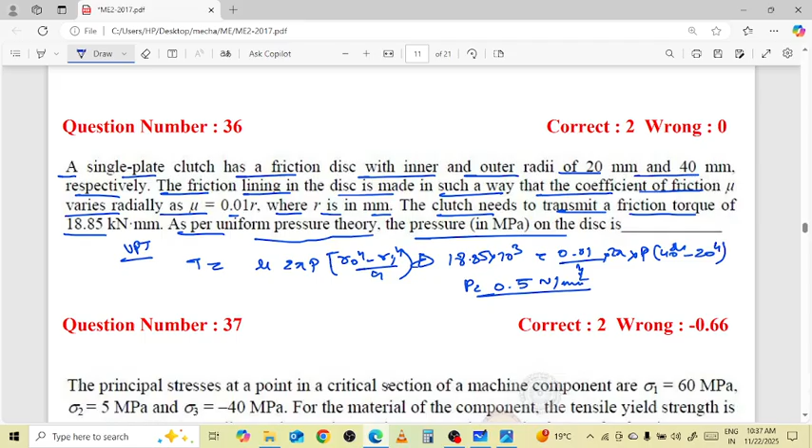We have to find the pressure value here. So 18.85 multiplied with 10 raised to power 3 equals 0.01 divided by 4 into 2 pi into p times 40 raised to power 4 minus 20 raised to power 4. So the p value is equal to 0.5 Newton per millimeter square. So here it is also in megapascal. Newton per millimeter square is megapascal, right?

Easy. Now next question. The principal stresses at a point in a critical section of a machine component are sigma 1 60 megapascal, sigma 2 5 megapascal, sigma 3 equal to minus 40 megapascal. For the material of the component, the tensile yield strength is sigma y 200 megapascal. According to the MSST, maximum shear stress theory, the FOS is to be asked: 1.67, 2, 3.6 or 4. MSST, maximum shear stress theory.

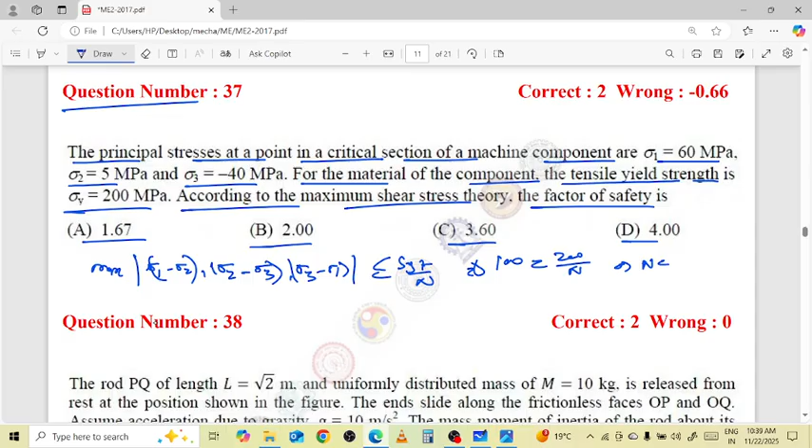So over to you here: 100 is equal to 200 by factor of safety, so the n value is 2. Easy. Next question we have.

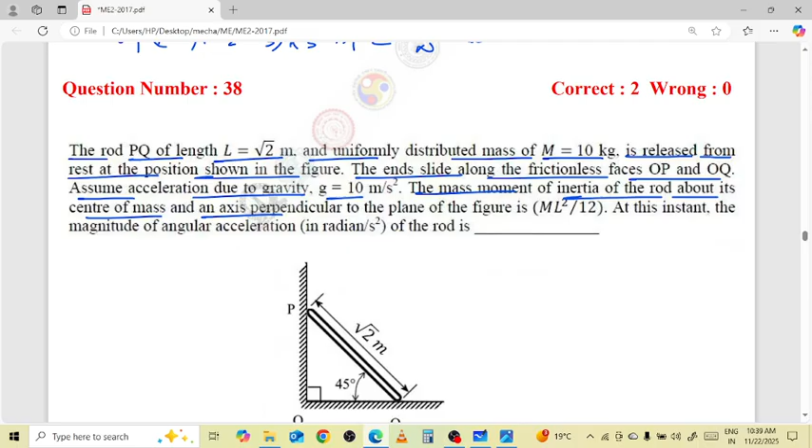Next, 38: the rod PQ of length L equal to square root of 2 meter and uniformly distributed mass M equal to 10 kg is released from rest at the position shown in the figure. The ends slide along the frictionless faces OP and OQ. Assume acceleration due to gravity g is equal to 10 meter per second square. The mass moment of inertia of the rod about its center of mass and axis perpendicular to the plane of the figure is ML square by 12. At that instant, the magnitude of angular acceleration of the rod is to be asked.

Here the rod POQ is given, with side square root of 2 meter, the PQ length, and 45 degrees. So the inertia is equal to ML square by 12 plus M y square. So here the value is 10 multiplied with 2 by 12 plus 1 upon 2, so 6.67 kg meter square. We know the torque: torque is equal to mg times x.

x displaces, equal to I alpha. So alpha value is mg times x upon I, and the 45 degree angle is visible, so here x is square root of 2 by 2. So the value of alpha is 10 into 10 into 0.5 by 6.67. So alpha is equal to 7.5 radian per second square.

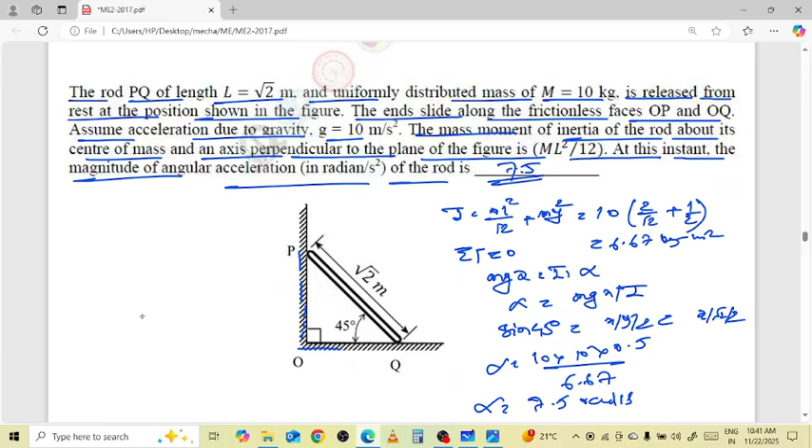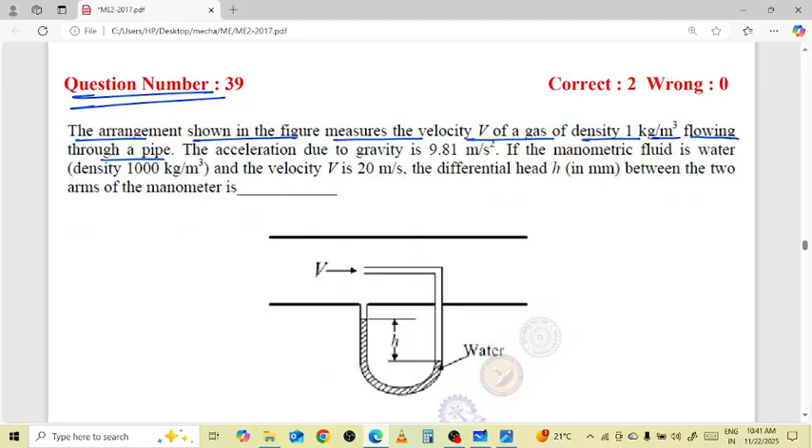Next question we have question number 39. The arrangement shown in the figure measures the velocity v of the gas of density 1 kilogram per meter cube flowing through a pipe. The acceleration due to gravity is 9.81 meter per second square. If the manometric fluid is water, density 1000 kg per meter cube, and velocity is 20 meter per second, the differential head between the two arms of the manometer is to be asked. Here velocity is given and head is asked.

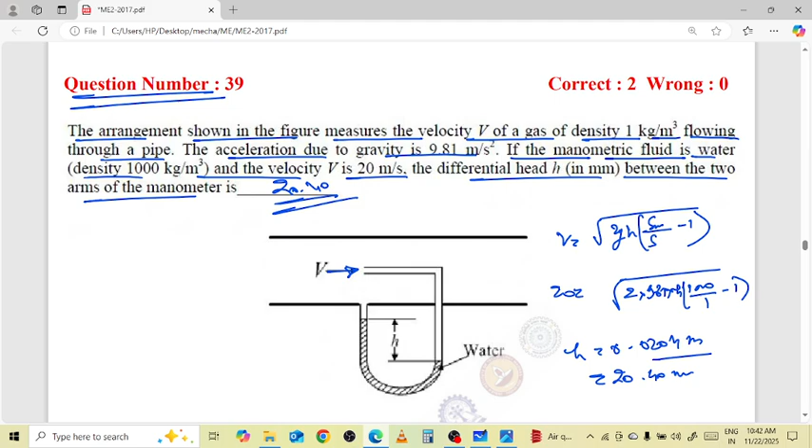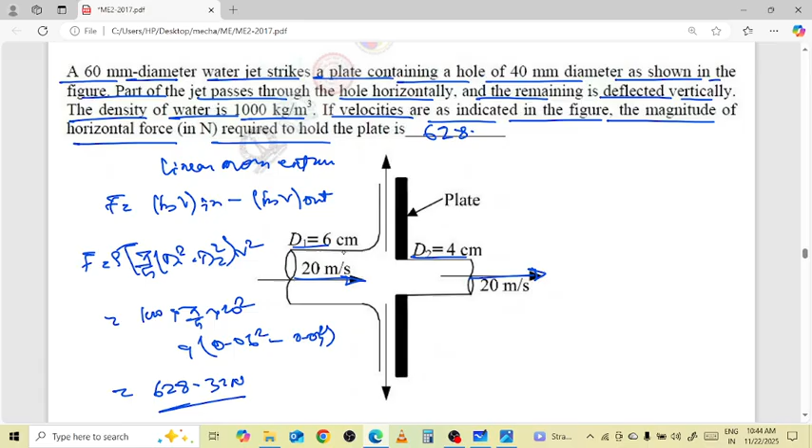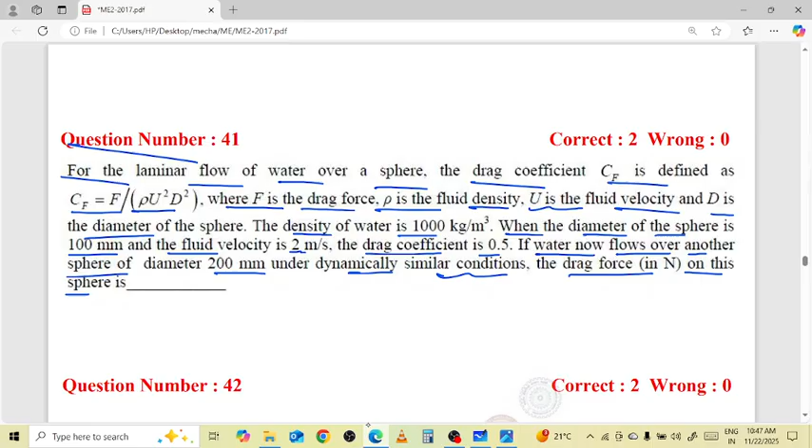I know the condition that F1 is equal to F2. So find the value of F1: CF times rho u1 square d1 square, 0.5 into 1000 into 2 square into 0.1 square. So the value is equal to 20 Newton. Same for F2. The drag force is asked, so it's 20 Newton. Easy. Now next question, 42nd.

In a Rankine cycle for the steam power plant, the turbine entry and exit enthalpy are 2803 and 1800 respectively, and the enthalpy of water at pump entry and exit are 121 and 124 kilojoule per kilogram. The SSC, specific steam consumption, is asked here. So we know SSC is 3600 by net work done. So here 3600 over net work done: turbine work 2803 minus 1800 plus pump work 121 minus 124. So it is 3.6 kilogram per kilowatt hour.

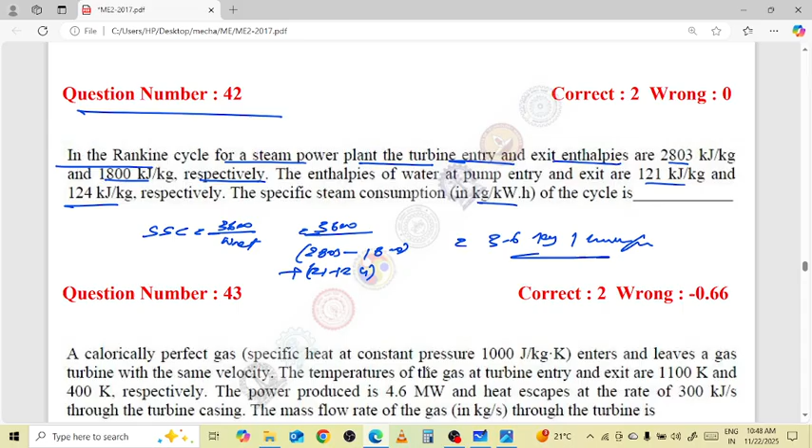Next question we have on the screen there. A calorically perfect gas, specific heat at constant pressure 1000 joule per kilogram Kelvin, enters and leaves a gas turbine with the same velocity. The temperature of the gas at the turbine entry and exit are 1100 and 400 Kelvin respectively. The power produced is 4.6 megawatt and the heat escapes at the rate of 300 kilojoule per second through the turbine casing. The mass flow rate of the gas in kilogram per second through the turbine is to be asked.

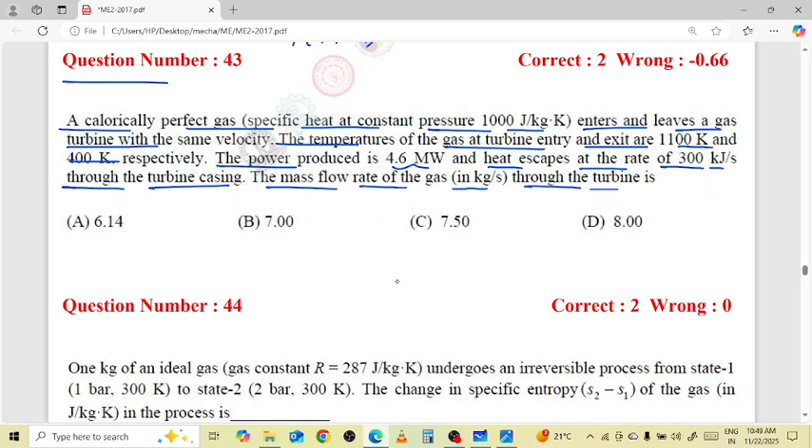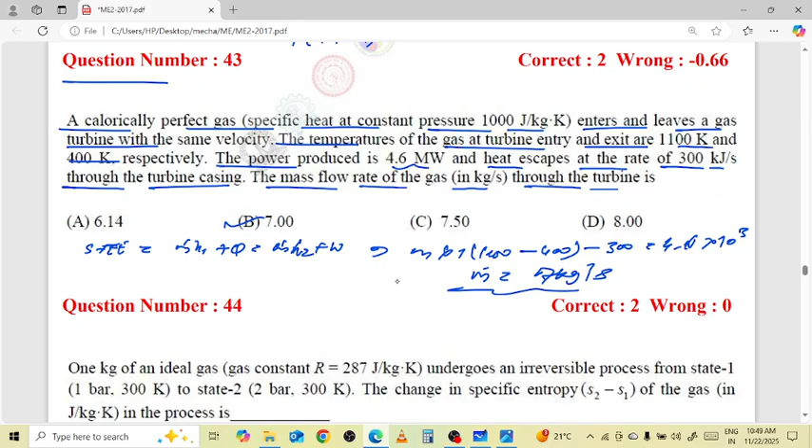Okay, तो हम यहाँ पे लगाएंगे steady flow energy equation, which is m1 h1 plus Q is equal to m2 h2 plus work done. So the m value: m into 1100 minus 400, minus 300, is equal to 4.6 into 10 cube. So the mass flow rate आपका 7 kilogram per second. It's Bravo, right choice for this, right?

Next question we have on the screen, 44. बोल रहा है 1 kg of an ideal gas, gas constant 287 joule per kilogram Kelvin, undergoes an irreversible process from state 1 bar 300 Kelvin to state 2 bar 300 Kelvin. Change of specific entropy of the gas in joule per kilogram Kelvin. So delta S here: the gas undergoes state 1 to 2, 300 Kelvin, 300 Kelvin temperature.

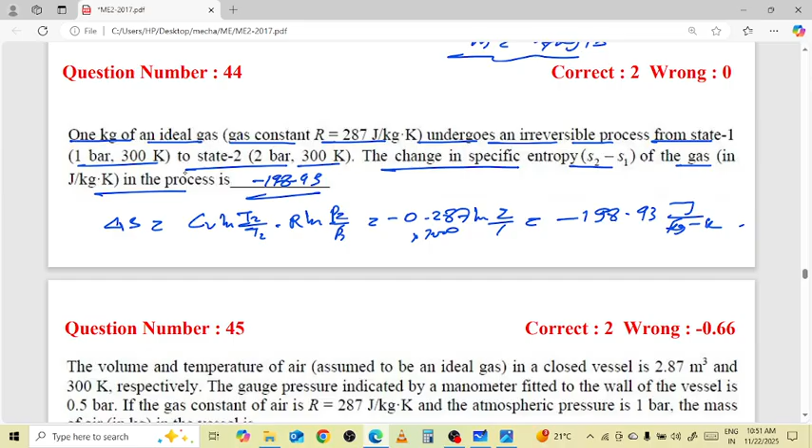45. The volume and temperature of air, assumed to be an ideal gas, in a closed vessel are 2.87 meter cube and 300 Kelvin respectively. The gauge pressure indicated by a manometer fitted to the wall of the vessel is 0.5 bar. If the gas constant of air R is equal to 287 joule per kilogram Kelvin and the atmospheric pressure is 1 bar, the mass of air in the vessel is to be: 1.67, 3.33, 5 and 6.66. Okay, so

V is equal to 2.87 meter cube. Temperature is equal to 300 Kelvin. Atmospheric pressure is equal to 1 bar, R 287 joule per kilogram Kelvin. So PV is equal to mRT. Absolute pressure is atmospheric plus gauge. So here the pressure is 0.5 plus 1, 1.5 bar. Now by PV is equal to mRT, the value of m is equal to PV by RT.

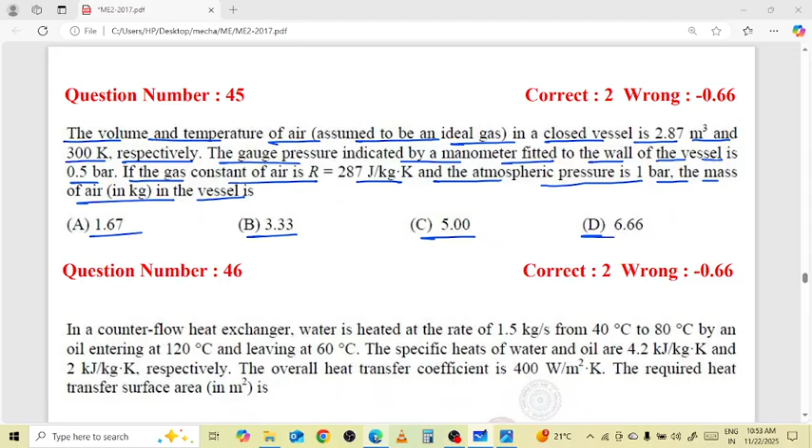So 150 into 2.87, divided by 0.287 into 27 plus 273, 300. So the total value is equal to 5 kilogram. It's Charlie, your right choice for this.

Next question. In a counterflow heat exchanger, water is heated at a rate of 1.5 kilogram per second from 40 degrees Celsius to 80 degrees Celsius by an oil entering at 120 degrees Celsius and leaving at 60 degrees Celsius. Specific heat of water and oil are 4.2 kilojoule per kilogram Kelvin and 2 kilojoule per kilogram Kelvin respectively. Overall heat transfer coefficient is 400 watt per meter square Kelvin. Required heat transfer surface area: 0.104, 0.022, 10.4 and 21.84. So we have to put in effort over here.

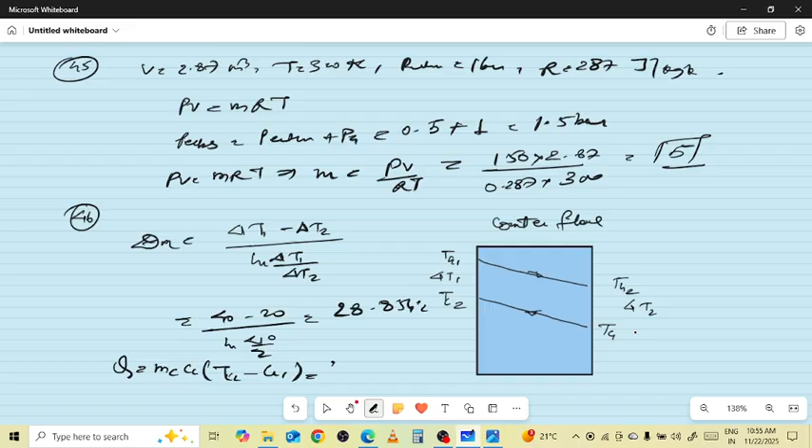And we have Q is equal to m C TC2 minus TC1. So the value is equal to 252 into 10 cube equals 400 into area into 28.854. So the area value is equal to 21.83 meter square.

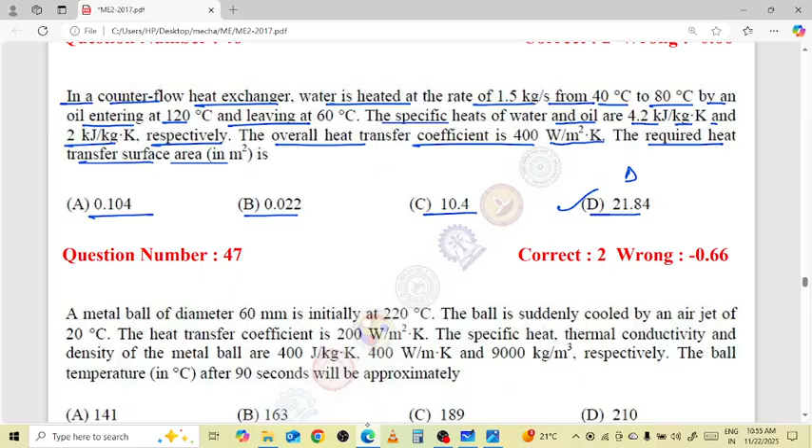Yeah, the 21.83. It's D. Option D is right over here. Next question, we have the 47.

Metal ball of diameter 60 millimeter is initially at 220 degrees Celsius. Ball is suddenly cooled by an air jet of 20 degrees Celsius. The heat transfer coefficient is 200 watt per meter square Kelvin. Specific heat, thermal conductivity, and the density of metal ball are 400 joule per kilogram Kelvin, 400 watt per meter Kelvin and 9000 kg per meter cube respectively. The ball temperature in degrees Celsius after 90 seconds will be approximately 141, 163, 189 and 210.

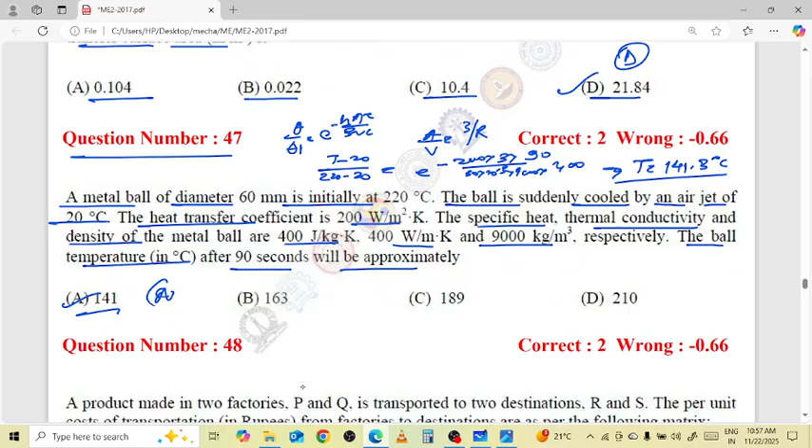...by 30 into 10 raise to power minus 3 into 9000 into 400, so the final value of the temperature is equal to 141.8 degrees Celsius, which is true over here. It's A, right? Now next question we have on the screen.

A product made in two factories P and Q is transported to destinations R and S. The unit costs of transportation from factories to destinations are as per the following matrix: 10 and 3, 7 and 4. Factory P produces 7 and factory Q produces 9 units. Production here: first is 7 and second is 9, and the demand at both destinations is 8. Using the North West Corner Rule, the transportation cost is X in rupees and the optimized total cost is Y in rupees, then X minus Y in rupees is asked.

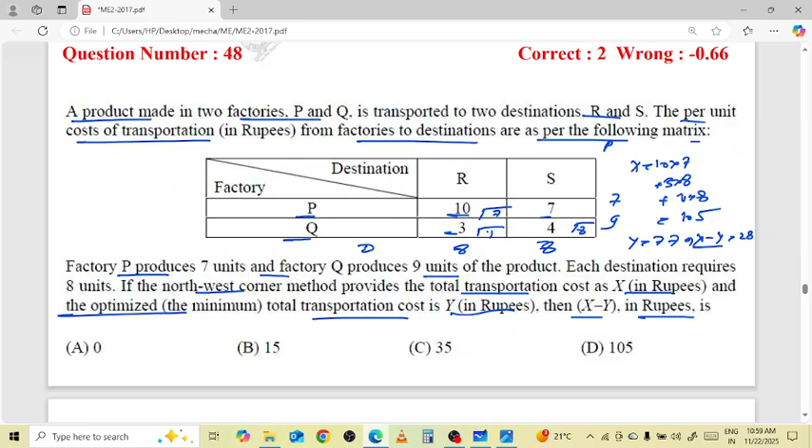Next question we have, a project starts with activity A and ends with activity F. The precedence relations and durations of the activities are as per the following table. A, B, C, D, E, F values are given.

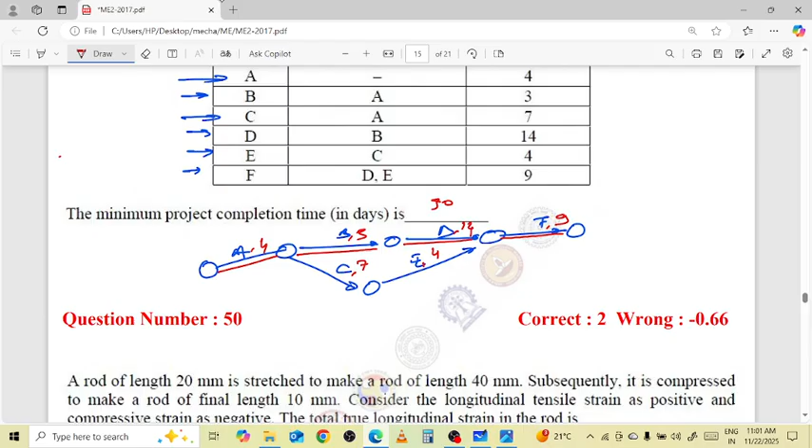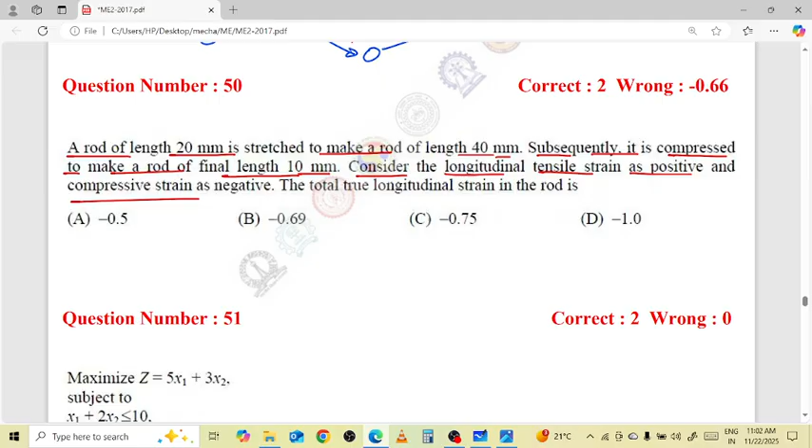Right. Move along for the next question, the 50th one. A rod of length 20 millimeter is stretched to make a rod of length 40 mm and subsequently is compressed to make the rod of a final length 10 millimeter. Consider the longitudinal tensile strain positive and compressive strain negative. The total true strain in the rod is minus 0.5, minus 0.69, minus 0.75, and minus 1. So which is true?

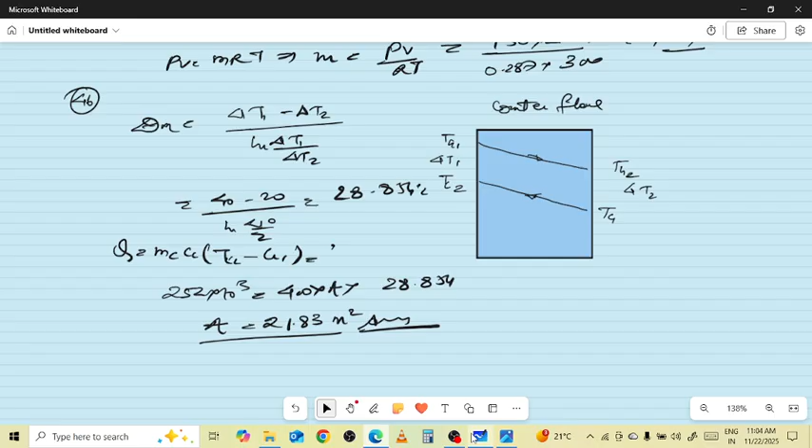Therefore, maximum z is equal to 5x1 plus 3x2. x1 plus 2x2 is less than 10, and x1 minus x2 less than or equal to 8. And for the simplex, x1 plus 2x2 plus s1 is equal to 10, x1 minus x2 plus s2 is equal to 8. So maximize the value of z is equal to 5x1 plus 3x2 plus 0s1 plus 0s2.

Now the simplex is to be followed up to make a table for this. Here the value of Cj on that side. There is a basis in this direction. So here 0 s1 and 0 s2 values are to be there. Ej and Ej minus Cj values are to be there. Therefore Cj value is equal to 5, 3.

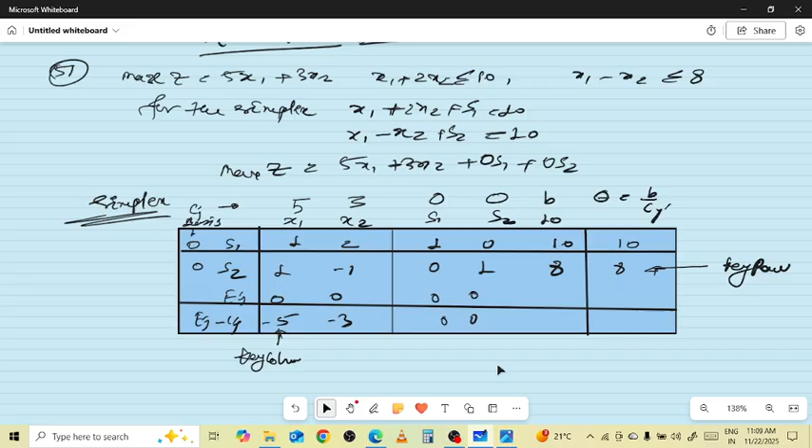First one 1 0 0 1, matrix form in the form of I, whose values are 10 and 8, and the last value is 0 0. The theta values given are 10 and 8. There is the key row and here the key column. S2 is the leaving variable.

So R1 is equal to R1 minus R2 old, to make the value of R1 new. So again the construction of the table. Yes, Cj value 0, basis 5 3 0 0, b and then 0, x1, x2, s1, s2.

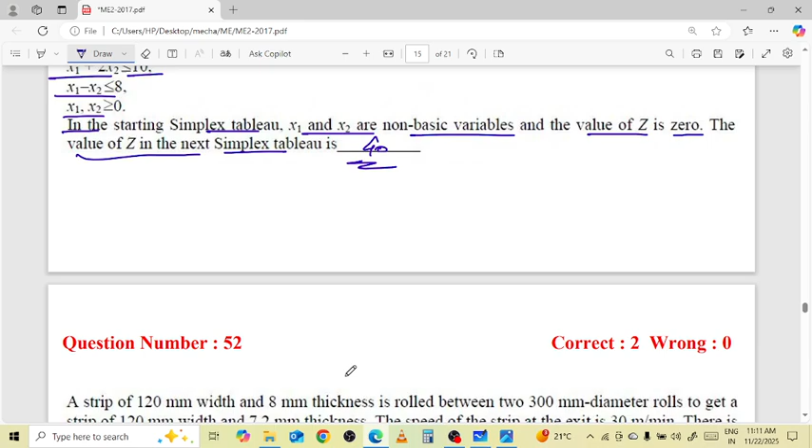Next we have a strip of 120 millimeter width and 8 millimeter thickness rolled between two 300 millimeter diameter rolls to get a strip of 120 millimeter width, 7.2 millimeter thickness. The speed of the strip at exit is 30 meter per minute, and there is no front or back tension. Assuming uniform roll pressure of 200 megapascal in the roll bite and 100% mechanical efficiency, the minimum total power in

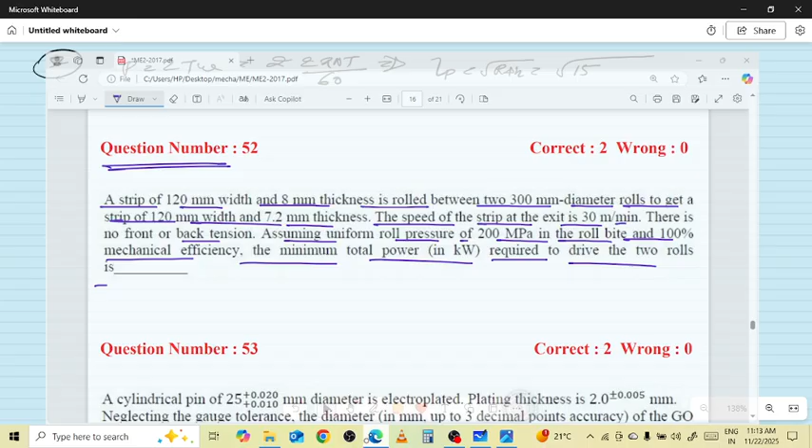Therefore we know the projected length is equal to root of r delta h. 300 millimeter, so 150, and 8 minus 7.2, is equal to 10.954.

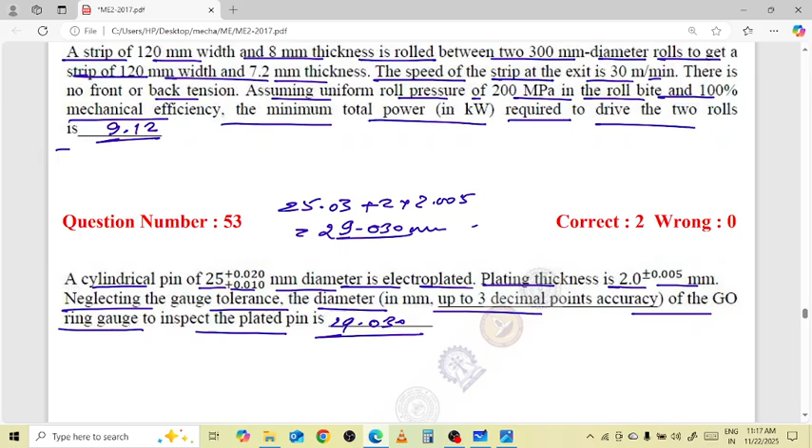29.030 mm in the case of diameter. Next question, move along to 54. During the turning of a 20 millimeter diameter steel bar at spindle speed 400 rpm, a tool life of 20 minutes is obtained. When the same bar is turned at 200 rpm, tool life becomes 60 minutes. Assume that Taylor's tool life equation is valid.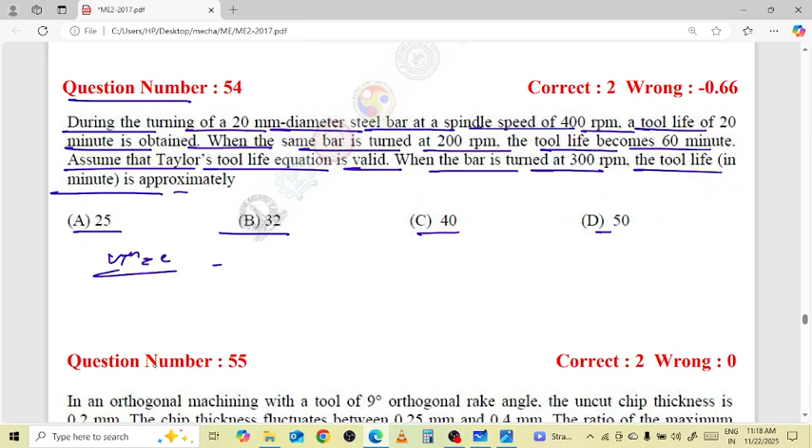When the bar is turned at 300 rpm, the tool life in minutes is approximately 25, 32, 40 and 50. Here the answer is 32. We know V T to the power n is equal to constant. From this relationship we compare 400 into 20 to the power n, 200 into 60 to the power n, and the third value to be calculated, 300 into T to the power n. After comparison we get n equal to 0.6309, and putting it in the third gives T equal to 32 minutes. So it's simply Taylor's equation applied.

Easy. Next question, the last of the technicals, 55: orthogonal machining with a tool of 9-degree orthogonal rake angle, the uncut chip thickness is 0.2 millimeter, chip thickness fluctuates between 0.25 and 0.4 millimeter, find the ratio of maximum to minimum shear angle during machining. We'll get it very easily. Here R1 is found once and R2 is found once. So R1's value

0.2 by 0.25 is 0.8 and 0.2 by 0.4 is 0.5, and alpha is the same in both, 9 degrees. Tan of phi 1 is equal to r1 cos alpha over 1 minus r1 sin alpha, and tan of phi 2 is equal to r2 cos alpha over 1 minus r2 sin alpha. So phi 1 comes to 42.087 and phi 2 comes to 28.18. Their ratio is 1.49, which is exactly what the question asks.

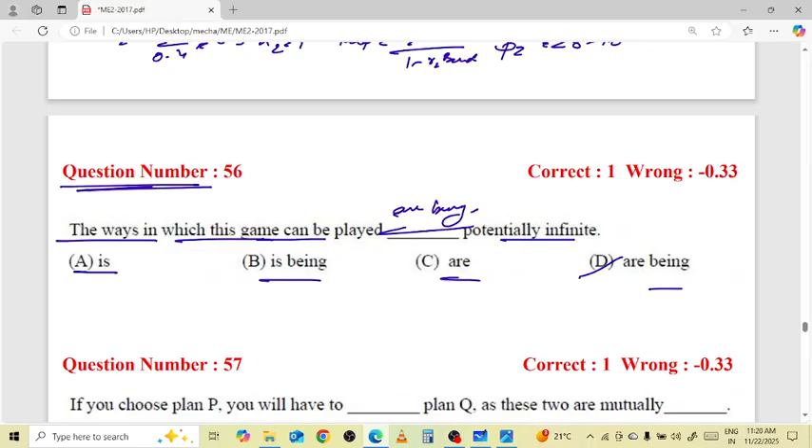So it's 'are being' is the right choice for this. Next question: if you choose plan P, you will have to forego plan Q as these two are mutually exclusive. The right choice for this is A.

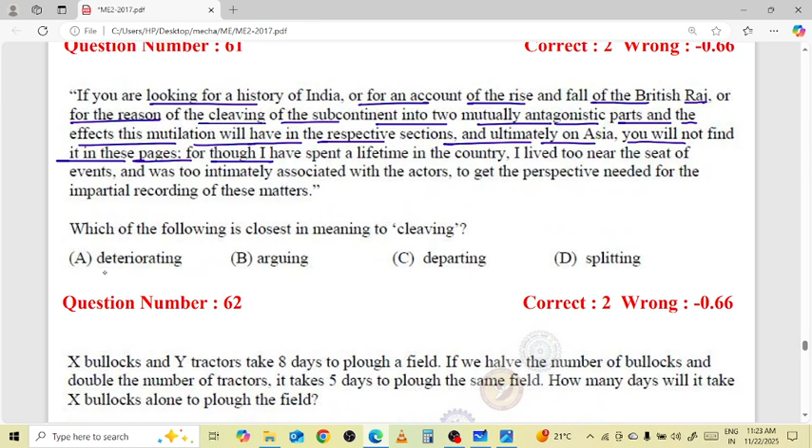If you are looking for the history of India, for the account of rise and fall of the British Raj, or for the reason of the cleaving of the subcontinent into two mutually antagonistic parts and the effects this mutilation will have in the respective sections, and ultimately on Asia, you will not find it in these pages, for though I have spent a lifetime in the country, I lived too near the seat of events and was too intimately associated with the

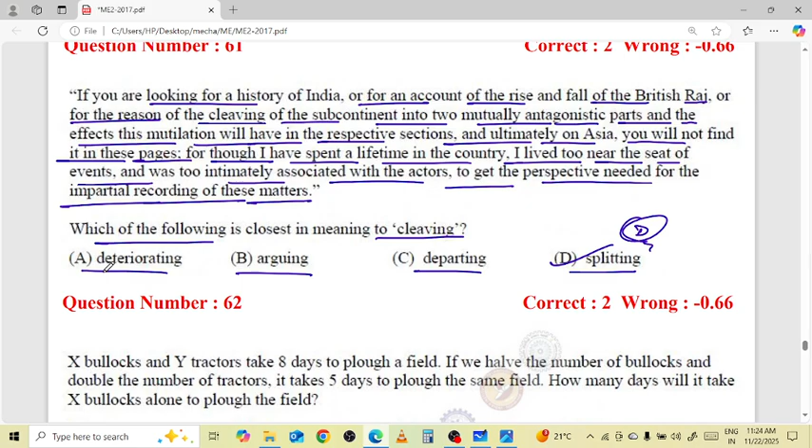actors to get the perspective needed for the impartial recording of these matters. Which of the following is closest in meaning to cleaving? Deteriorating, arguing, departing, and splitting. The value of splitting is right.

Next question we have: X bullocks and Y tractors take 8 days to plow the field. Half the number of bullocks and double the number of tractors take 5 days to plow the same field. How many days will it take X bullocks alone to plow the field?

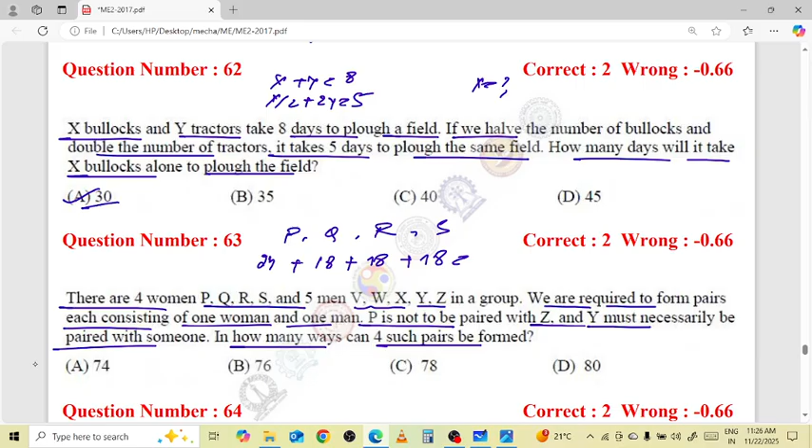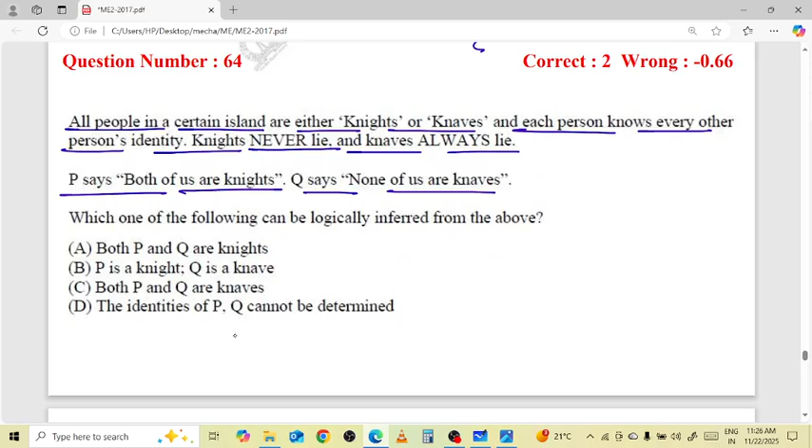Second last question of the day here. All people in a certain island are either knights or knaves, and each person knows every other person's identity. Knights never lie, and knaves always lie. P says both of us are knights. Q says none of us are knaves. Which of the following can be logically inferred from the above?

Both P and Q are knights. P is knight, Q is knave. Both P and Q are knaves. The identities of P, Q cannot be determined. Which is most appropriate?

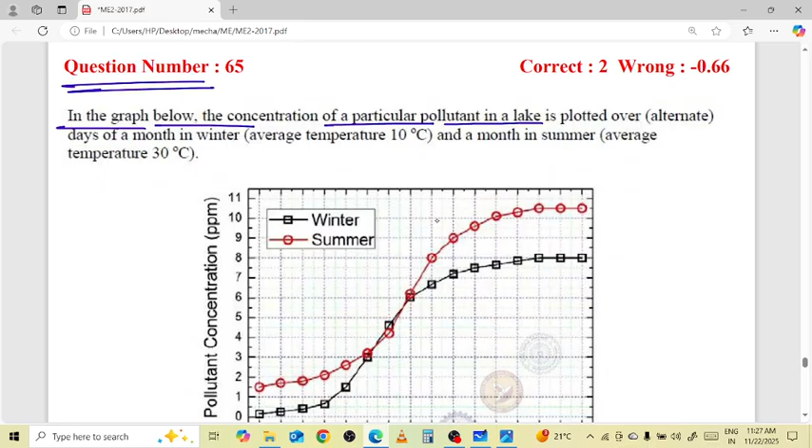Last question of our year 2017. In the graph below, concentration of a particular pollutant in a lake is plotted over alternate days of a month in winter, average temperature 10 degrees Celsius, and a month in summer, average temperature 30 degrees Celsius. Here the winter is in black and summer is the red one.